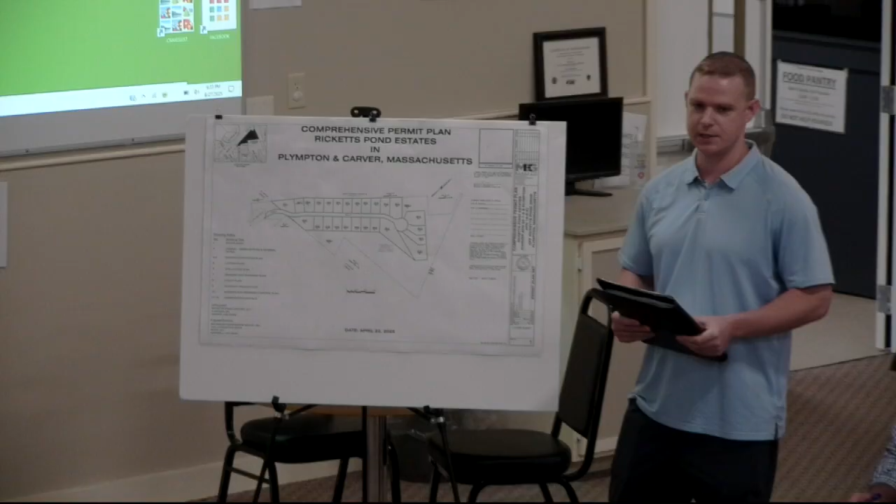Good evening. My name is Eric Shoemaker. I'm a civil engineer with McKenzie Engineering, and we designed the civil site plans before you. We're in receipt of Mr. Driscoll's review letter dated August 20th, and we're working through those comments, and we hope to submit a revision of the plans incorporating all of them. I'm going to walk through the site plans and provide an introduction to the civil design to get everyone up to speed. We'll start here on sheet 3.

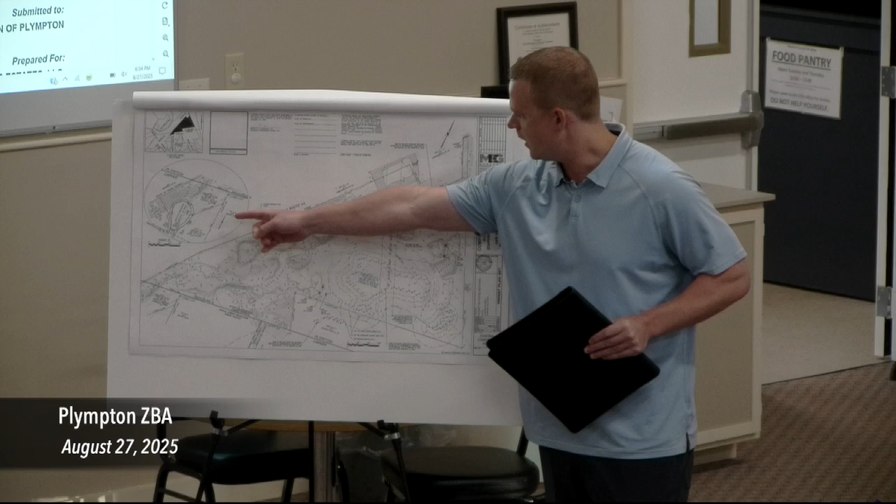This is the existing conditions plan. This shows the portion of the lot located in Plympton. The site itself is located off of Ricketts Pond Drive, down here to the southwest, and that's a subdivision development located in Carver. So you have the Carver-Plympton town line running across this southern portion of the property. The total lot area is about 24.4 acres, just over 1 million square feet.

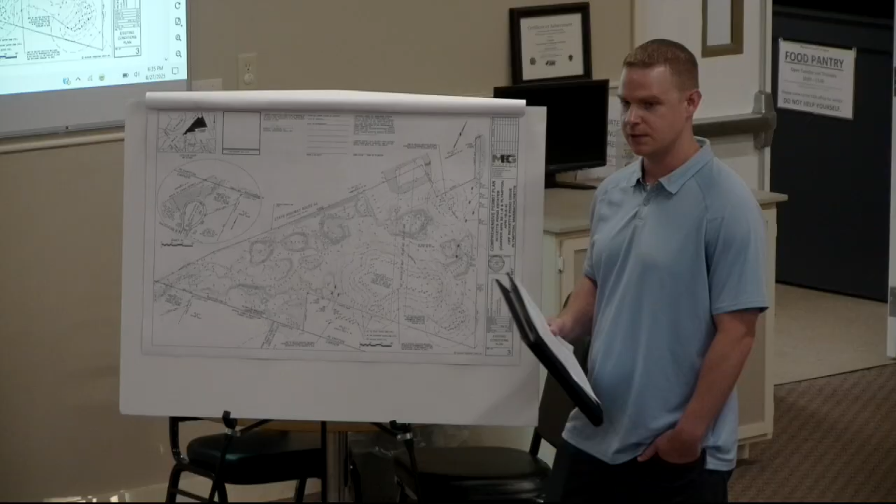Like I said, the property has frontage on Ricketts Pond Drive to the south, and that's how access to the development and the residential units will be provided, while all of the homes we propose will be on the Plympton portion. The site's currently undeveloped, and it consists of sand and gravel stockpiles as well as some access paths throughout the site. There's varying topography, as you can see from the plan.

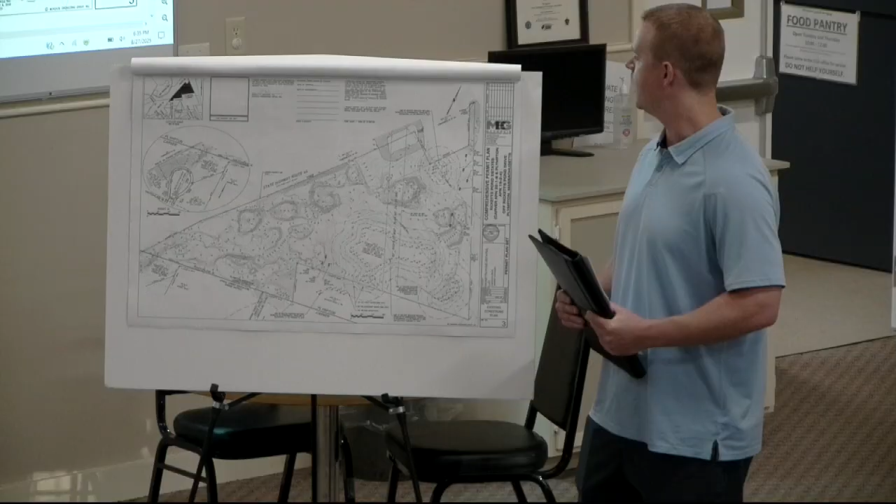And the rest of the site is undeveloped woodlands with some pockets of isolated vegetated wetlands. You'll see those located by the wetland flags at the central portion here. So we're located in the FEMA Zone X. In general, stormwater runoff seems to flow to the low point, which is this larger pocket of wetlands, and then it overtops and eventually makes its way to Ricketts Pond down to the southeast.

We conducted soil testing, as you can see from these test hole symbols. The soil was all consistent. It was sand. We dug holes in excess of 10 feet. We really didn't see any groundwater, and that really helped us with the stormwater design.

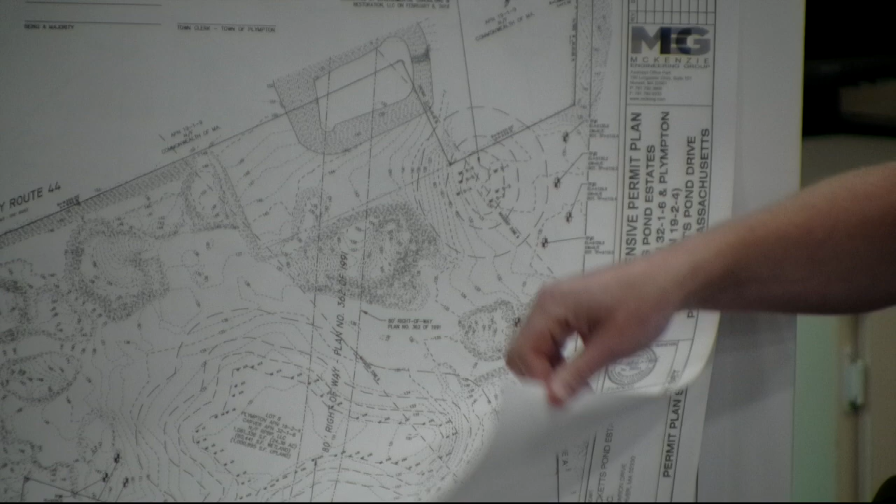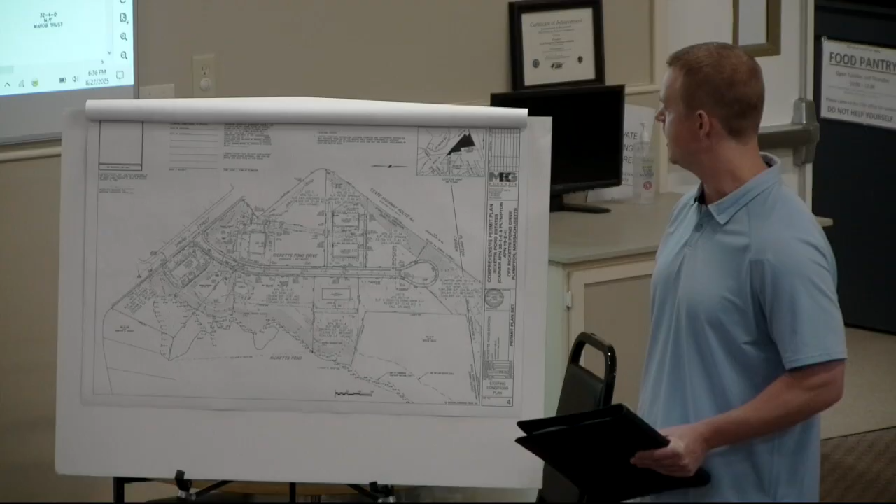This next sheet is sheet 4 for the existing conditions, and this just shows the as-built to date of this subdivision in Carver. We have a cul-de-sac road, Ricketts Pond Drive, and it's an industrial park. These are office warehouse buildings located on each side of the street. A few of the lots are in the process of being constructed, and a couple of them still need to be permitted.

I'm going to talk about the next plan, that's sheet 5, the lotting plan. This shows the 25 proposed single-family home lots, the 40-foot wide right-of-way, and Road A. We haven't chosen a name yet, along with our building setback lines we're using for this development. The leftover land you can see is currently being shown as Parcel A, and that's leftover land by owner.

So these lot areas range from 15,000 square feet to about 50,350 square feet. The largest of these lots is lot 17. It had more of its area located in the wetland buffer, so we just tried to give them a yard by making that lot a little bigger.

The proposed access to each lot will be located off of Road A, and as you can see from the inset plan on the left side of the sheet, Road A is going to connect with Ricketts Pond Drive. So this cul-de-sac at the end here has a 140-foot right-of-way diameter, and that's located to the northern end of the site, and that should be more than enough for delivery vehicles and fire trucks to turn around in.

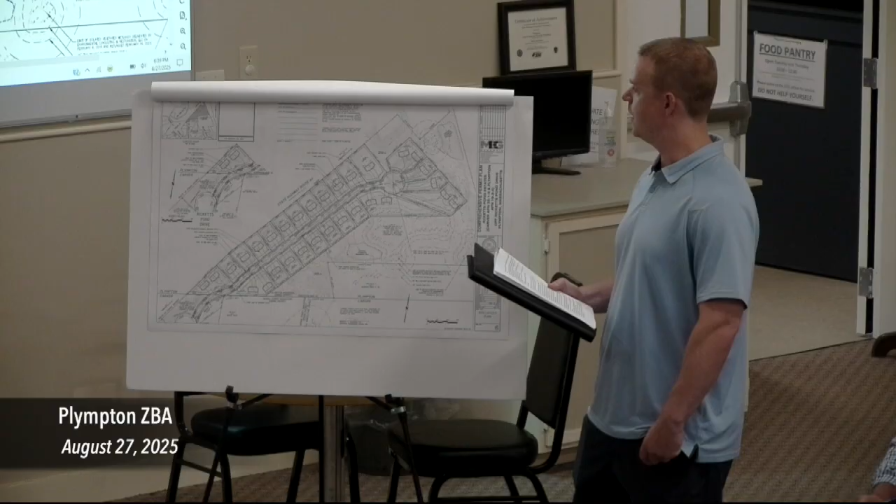The subdivision roadway itself, as I mentioned earlier, is a 24-foot wide bituminous concrete cross-section. It has a 40-foot wide right-of-way, and it has 1 foot of Cape Cod berm on each side of the road to kind of contain the stormwater there. I'm sorry, how wide is the road access? The road itself is 24 feet wide with a 1 foot curb on each side. Okay, thank you. So measuring outside of curb to outside of curb, you're looking at 26 feet.

Okay. The center line of the roadway is shown here on the plan, and it's 1,536 total feet of roadway, including the end of the cul-de-sac. As I mentioned, site access is going to connect right to the end of Ricketts Pond Drive in Carver, and we have a short stretch of road segment, about 200 feet in the town of Carver, before we reach the development and our proposed lots.

You can see the isolated vegetated wetland here, and we tried to keep our disturbance away from there as much as possible. The rear decks on that one unit are about 50 feet away from the IVW, and that's our closest disturbed area with a portion of building.

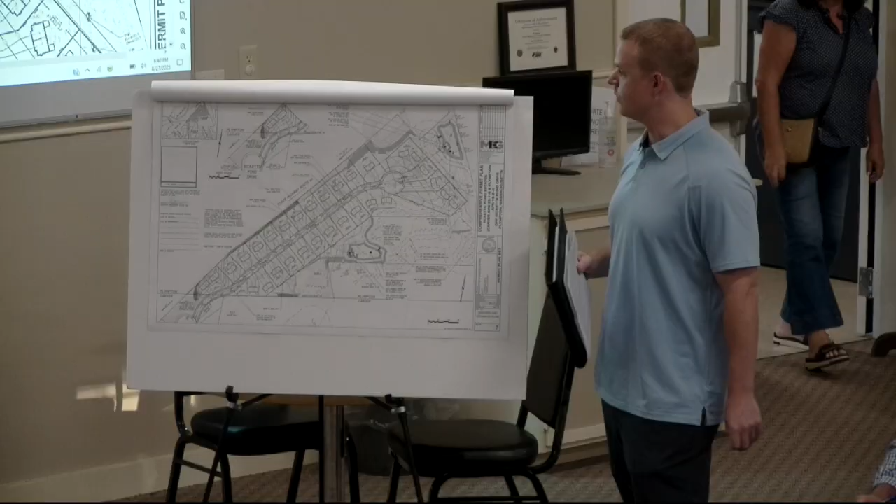The next sheet I'm going to speak to is the grading and drainage plan, that's sheet 7. So this sheet shows the grading and drainage design for the subdivision. Our goal was to design a drainage system that complied with the 2, 10, 25, and 100-year storm events. We want to attenuate those storms, and we want to comply with all of the local and state stormwater management regulations. So that was our goal for design.

In both the pre and post development, we analyzed a watershed of about 23.5 acres to design the storm system. There are several design points. The wetlands, each wetland is a design point. Several of the property lines are design points. And we reduce the peak rates and volumes directed at all of those design points with this design.

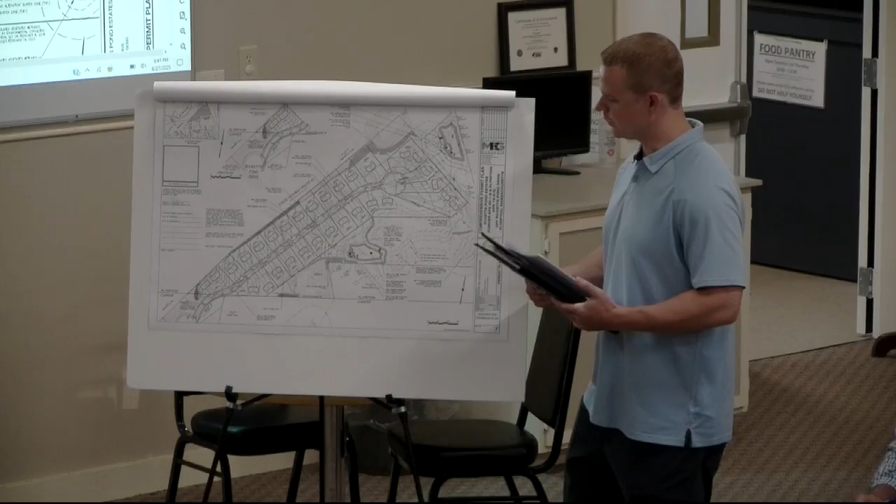So how we get there is a closed drainage system in the street that consists of a series of catch basins and drain manholes. We funnel the stormwater towards these catch basins, which we spaced strategically. From here, we pipe the runoff into the infiltration basin. But first it hits the sediment forebay, which is that small portion in the corner of the infiltration basin.

That gets us our total suspended solids removal, and it helps kind of treat the stormwater before it gets infiltrated into the native soils. So we're complying with all of the stormwater management regulations. We achieve the water quality, the recharge, the TSS removal with this design. So that's a little bit about that. The next sheet will be the utility plan. So that's sheet 8.

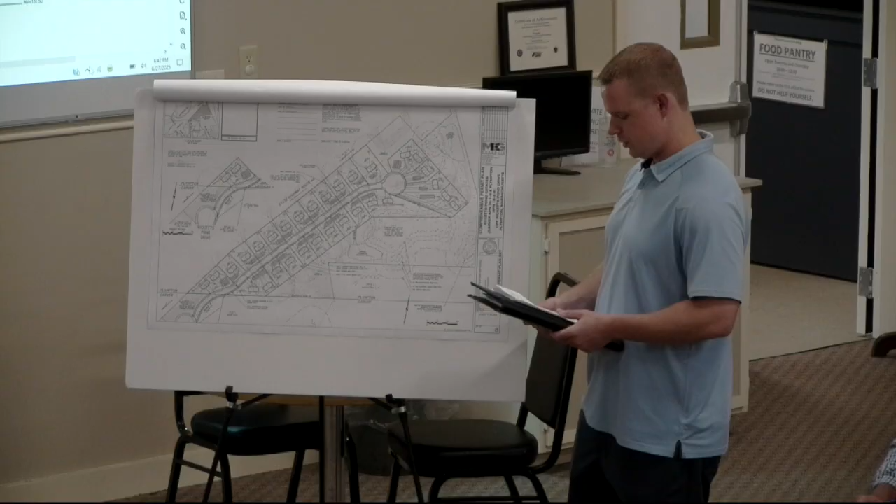So this is the utility plan that shows wells, it shows septic systems, underground electric for each lot. I preliminarily sized these septic systems based on the soils we were seeing out there, just to make sure we could fit all of the septics and had the required buffer zones to the proposed wells. We'll obviously work in conjunction with the Plympton Board of Health as we get further along in development to finalize these designs, but we wanted to make sure everything fit.

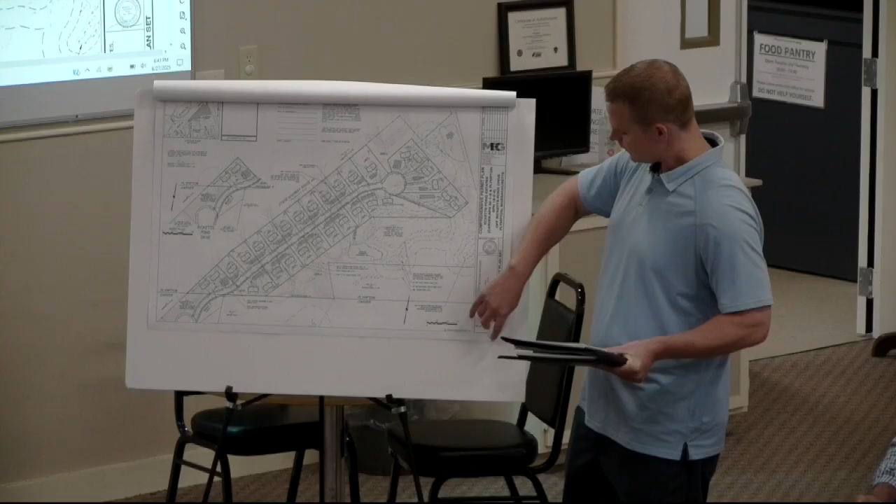That's a good question there. So each unit, each two-family unit has its own septic and its own well? There's one well and one septic on each lot. On lots where there's 2 duplexes on the lot, it's a shared septic system and a shared well. And you can see an example of that is on lot 15, kind of right above the cursor there.

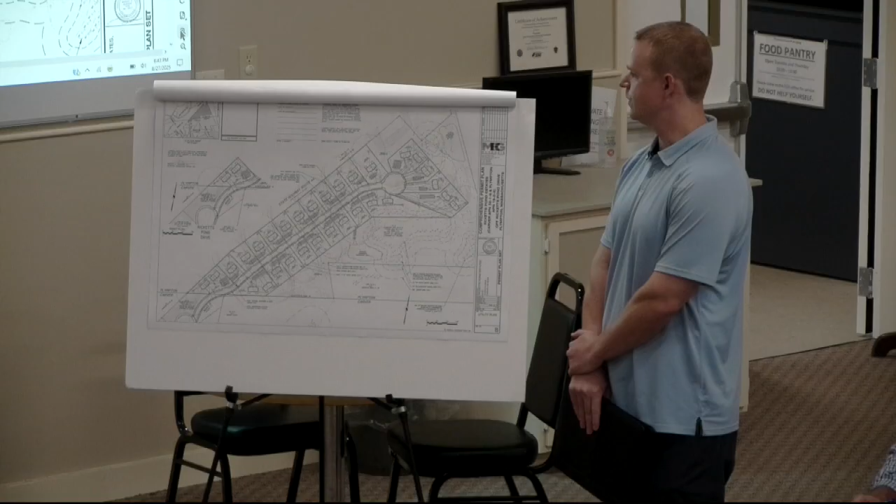Now, the leaching field, is that per lot, or do they have it in common, or how does that work? It goes into a shared septic tank and then into the fields. The fields were calculated based on the number of bedrooms on the lot. So for lots with 2 duplexes, we took that into account in the sizing. So you'll see the septic system is a little bit larger on lot 17 compared to lot 18, just because there's two buildings going into it.

Okay, but what I want to make sure I get clear is that, for the single duplex lots, their lot lines, that's their leaching field, right? Or am I not correct? I think one leaching field per duplex. Okay, that's what I was trying to get at. Thank you. And I'm sorry.

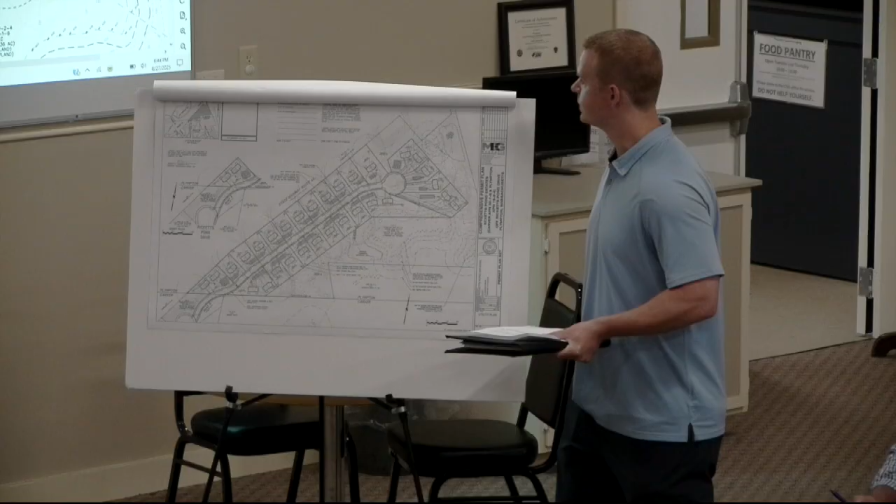Go ahead. Just to clarify, even on the 15,000 square foot lot that you referenced with a two-family unit on it, that 15,000 square foot lot would contain a septic system and two wells or one well? Just one well. Okay. One well, and I believe, as of currently, we're showing one service. That could be subject to change, but this is where we were for our first submission.

Could I ask a question? The septic is based on the number of bedrooms. Okay. And that's standard what the law is right now in the state or in Plympton? That's Title V regulations. Title V regulations, okay. It's 110 gallons per day per bedroom, and we use that to size the system. Okay, thank you.

Can I ask a question? Can the town ask questions, or do you want to wait till the end? Through the chair, yes. Oh, yeah, my name's Dr. Bonkros, Lake Street. One of the lots here with two duplex houses on it, it appears to be one septic tank for 4 families. Is that accurate? I would like to finish the presentation before we take questions, please. All right, then. That's fine. We have to wait till the end.

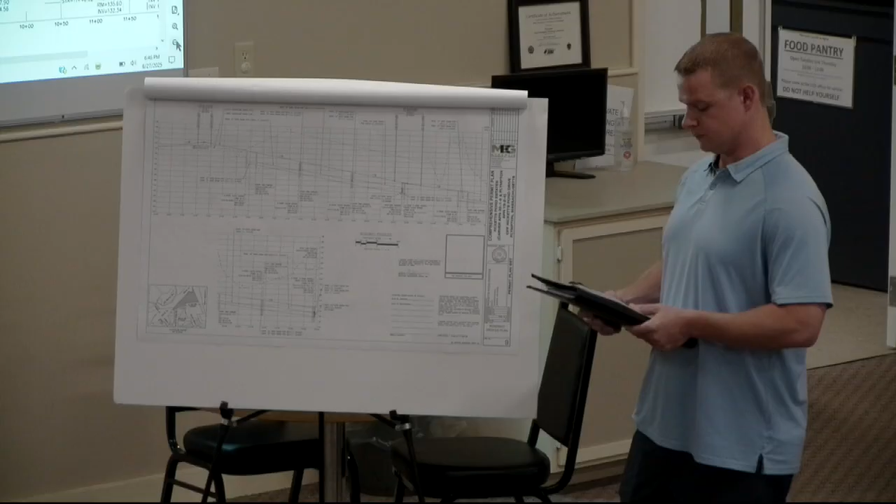The final sheet I'll speak to is the roadway profile. This is sheet 9. So this shows our proposed roadway profile and the drainage structures in the roadway. As you can see, there's no conflicting utilities here. We show the centerline grades.

The grades of the roadway range from 1.1 to 1.7%, and there's a high point at the Carver town line to divide up the stormwater between the Carver and the Plympton portions of the site. And as I mentioned, we have no utility conflicts to worry about here, so it was pretty simple design.

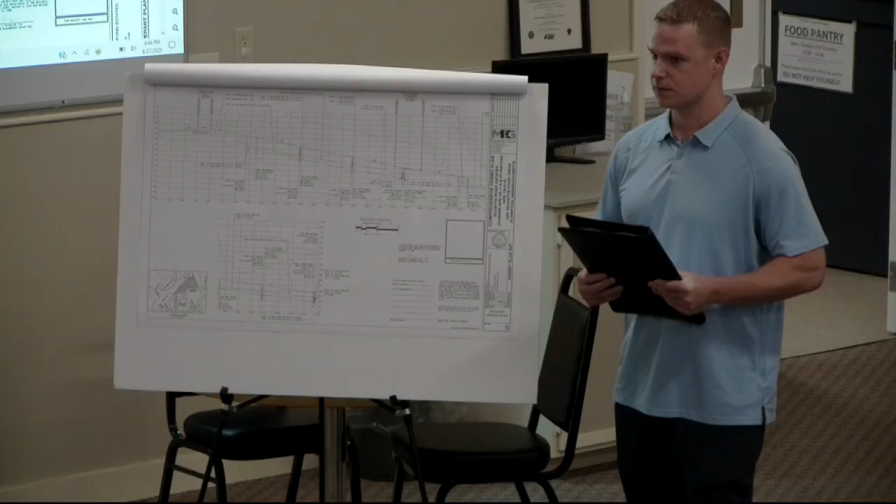So, are you saying that the area where the town line meets, that's the higher elevation, and it sort of slopes downward? Yeah, we chose that as a high point to completely divide so we're not taking runoff from Carver and putting it onto Plympton and vice versa. Thank you.

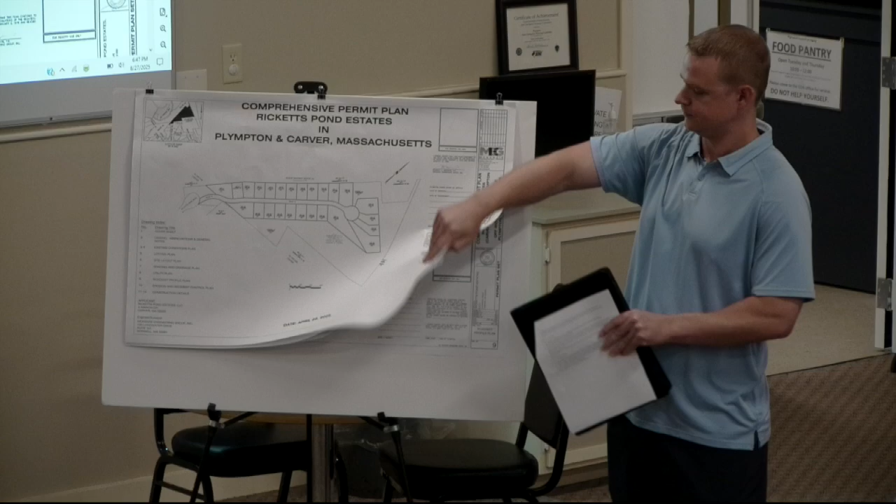Okay, all right, so let me just get back to Mr. Bloomquist's question. On the lots with two buildings, two residences, right? Is there one well and one septic, or one for each building? There's one septic and one well per lot. Okay. So it doesn't matter how many buildings are on it.

Okay. And like I said, as we further develop the plans, we'll work with the Board of Health, refine the design. We'll take another look at the septic system designs for the individual lots after we do the soil testing and submit that. Okay, and because that one is servicing more bedrooms, would those have to be larger than the other ones that are just serving the single lots? Yes, and they are. They're sized that way currently. Did that answer your question?

Just to reiterate, is one septic tank for 4 families at some of those situations? We currently have shared septic tanks, yes. But like I mentioned, we're going to revisit the design when we submit to the Board of Health. These are preliminary in nature for a utility plan. Okay. Thank you. Oh, I see. Yeah. Okay.

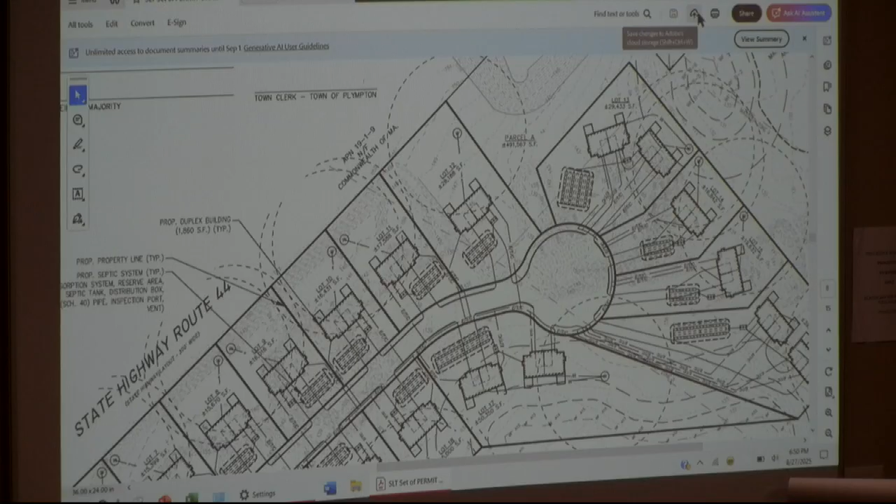I do have one question. These stormwater management areas that you put on, I think it's Plan 6 perhaps shows them best. Are they in the wetlands themselves? Are they considered adjacent to the wetlands? Because they're kind of like on the edges of these markers. I was wondering about that. Yeah, that's a great question. So that's shown on sheet 7. Oh, 7, sorry. I can explain it a little bit.

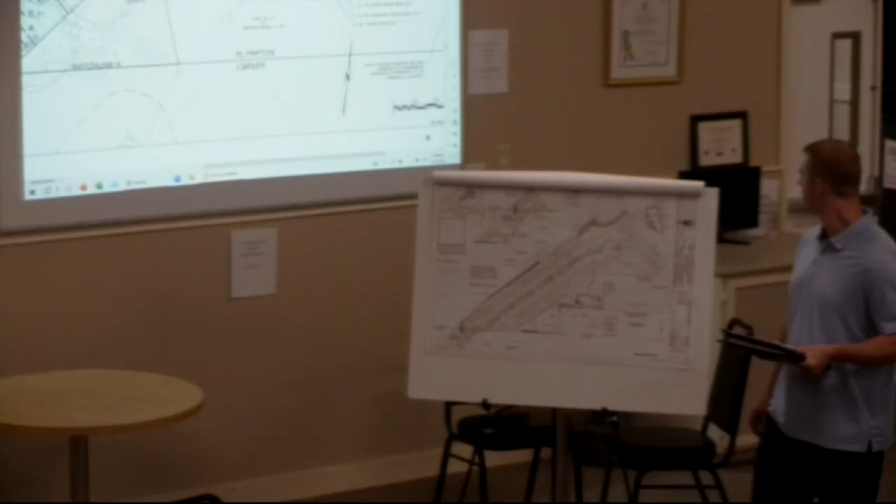So the stormwater area you're talking about, yeah, that's a great example there. That shows the contour lines. It's a basin, an infiltration basin, so it's really a depression in the ground. We take a portion of the cul-de-sac, we capture the runoff, and we send it to that basin. Luckily here we have sand, so we can infiltrate all of the runoff going there. And then we include a small emergency overflow, and we just direct that at the wetland. But you can see the 100-year storm I label on the plan never even makes it up to that emergency overflow.

So it's next to the wetland. I believe we're over 50 feet away with that one. I want to say eyeballing it about 60 feet from the corner of the basin. So it's next to it. These basins have to be tucked into a low point when you think about it, because you're directing stormwater downhill. You want to get everything from the cul-de-sac moving downhill to a low point where you can service the whole development.

Because it seems like the general way you want the water to flow is sort of down and away, I'm not sure, to the south, to the southeast of where the houses are. Is that the general idea, to direct that away from the homes and toward either these wetlands or these vegetated lands or whatever's not being used?

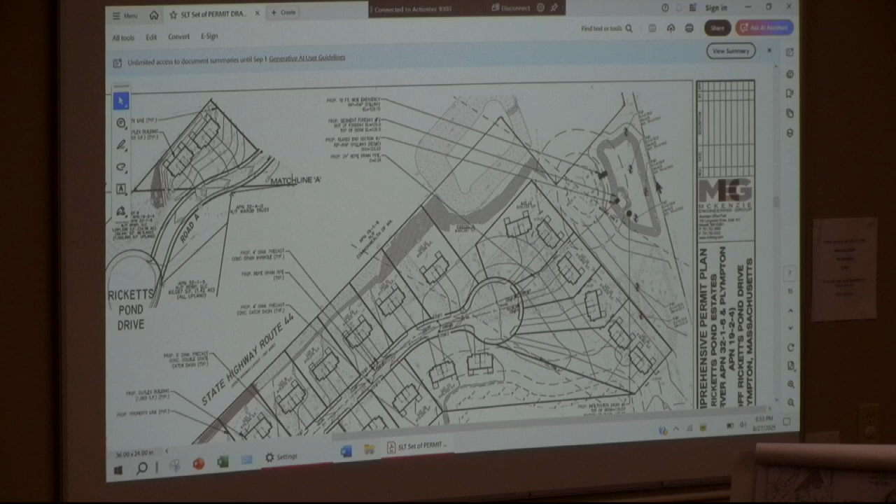Now, and I'm sorry if I might be asking basic questions here, but the little lines that you draw around the catch basins, these little parallel lines, what is that?

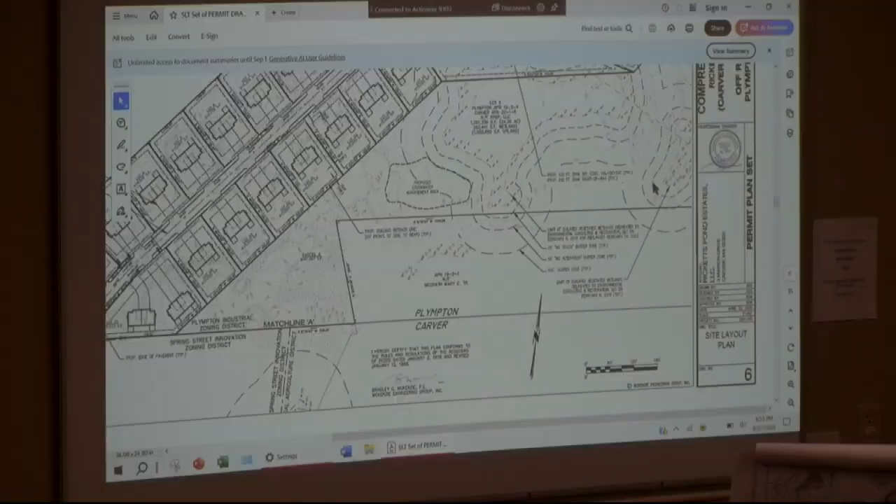Does that represent a material, or what do those represent? So if you look kind of close to that, they're actually 1-foot grade contours, and it might be tough to see if you have an 11 by 17 plan. Oh, I forgot, I have the bigger plans over there if anyone wants them. Yeah, so they're increments of 1 foot vertically. It's the same as looking at a topo map, topography map.

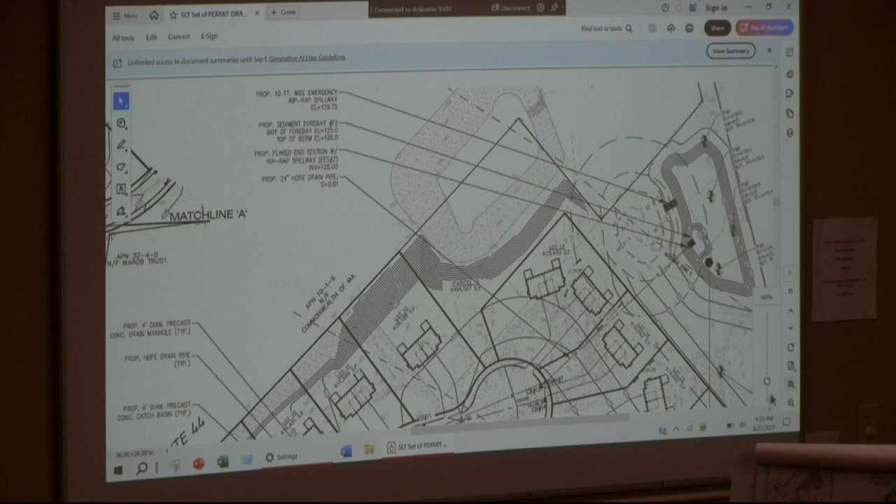So, do these lines represent physical structures, or just topographical changes? Okay. Exactly, yep. Right. Just 1 foot differences in grade, right? Yeah, these are 1 foot, and I think in this lower basin, I have the bottom at 131.5. So at that point, I put a dash line just to represent the half, so it's not overlooked when it's being constructed. And I'm sure it's somewhere in the plan, but how deep are these basins that you show here?

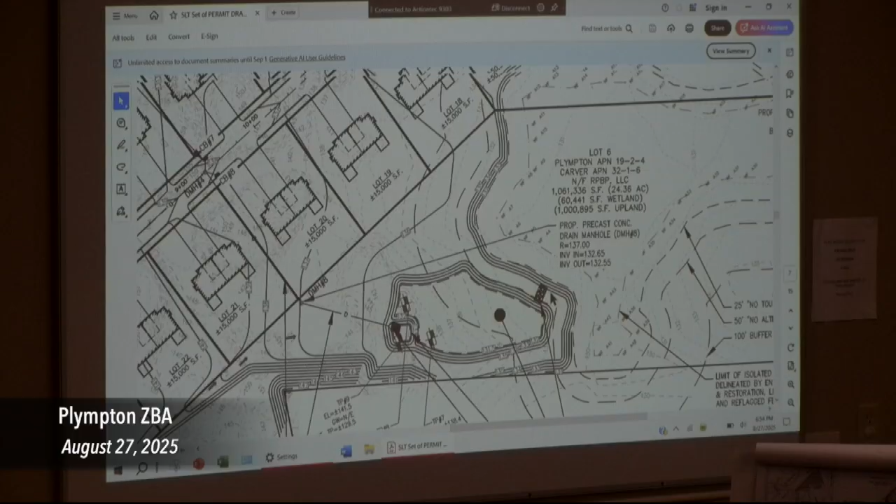So the bottom one here on the page, the top of the berm is 135, the bottom of the basin is 131 and a half, so it's 3.5 feet deep. The other basin, the top of it is 130, the bottom is 125, so it's 5 feet deep. And the state law requires us to maintain a foot of freeboard, so that flood elevation needs to be 1 foot different from the top of the berm. We can't flood right up to the berm, we have to flood a foot below it, just as an emergency precaution.

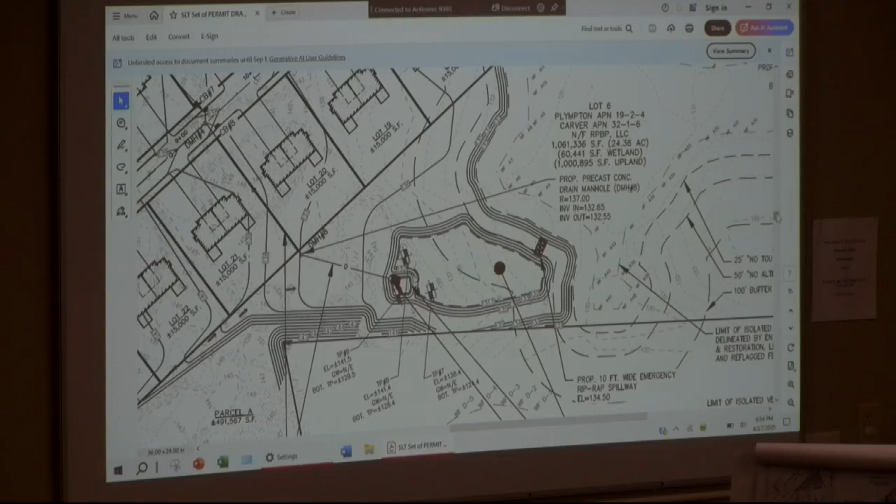Madam Chair, question: are there any below-grade retention, tanks, let's say, below grade for runoff? Yeah, that's not proposed for this development. Not on this development. Can I ask a question? So you've done plans like this before for multiple units, common for you. Have you seen projects like this so close to wetlands developed successfully?

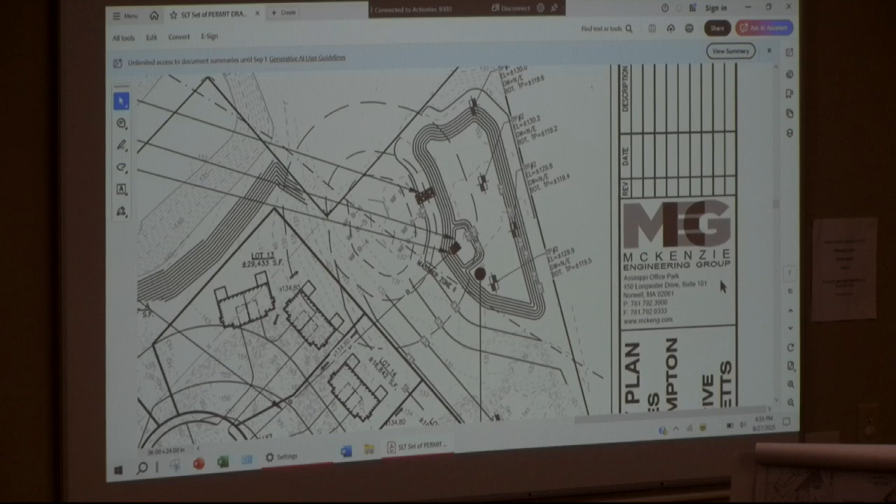Yes, I have, and I've seen it in worse soil conditions than this, which makes our job a lot harder as designers. It means the basin needs to be bigger, the septic needs to be bigger. This was a best-case scenario for us. We hit sand, it was all we saw in the test holes, and like I said, we used some pretty serious machinery out there. We got over 10 feet deep. It was sand the whole way down, so that gives us the best infiltration rate, and it really makes the design easier for us. Okay, thank you. Yeah, that makes sense. From what I've seen of the lot, it is sandy and rocky.

Mr. Chairman, the residents of this complex will all have HOAs, is that true? I believe so. I don't think that's the proper question to ask this gentleman. But yes, that has been discussed in the past, and we'll probably discuss that in the future. And I think the original proposal, as I recall, was that each duplex would have its own HOA. But I don't think we're quite ready to have a discussion about it. I can answer that question. All right, if you wish to.

Brad McKenzie, McKenzie Engineering. Each lot will be its own condo association, and overarching all of that would be a homeowners association, because it's really no different than a single family; it's a subdivision with a road, a right of way. So again, each lot, whether it be 1 or 2 duplexes, would be its own condo association. As the plans are further developed into final construction plans and the legal documents are prepared, there probably will be exclusive use areas and common areas designated on plans to be recorded at the Registry of Deeds, along with unit deed plans and master deed plans.

And that does make more sense, because I was wondering, if you had 30 condo associations, how would the common elements like the road be taken care of? Because obviously not everyone might be quite as attuned to that sort of thing. But the HOA is an interesting idea that may take care of the issue. Again, that's something we'll be talking about more in upcoming meetings, about the structure and who's responsible for what and how it's delegated. So, does anyone else have a question about this presentation before we do something else?